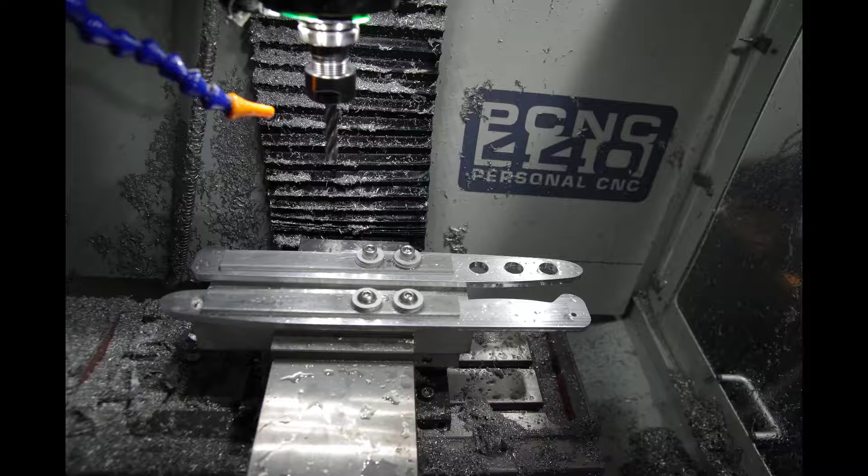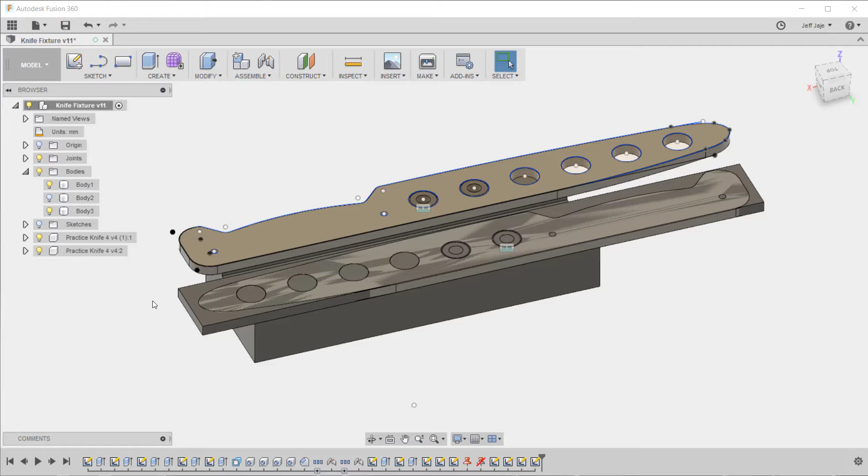Jeff from CAD/CAM Zen, and we're on part 3 of our martial arts training knife. We're actually going to be milling the knife here. So here's the knives and the fixture we previously made, and I want you to remember this is what the stock basically looks like. So when we're machining this, notice we've got some heavy material around this corner here, and obviously I've already machined these parts, so I'm just going to kind of show you some different ways that you could do it.

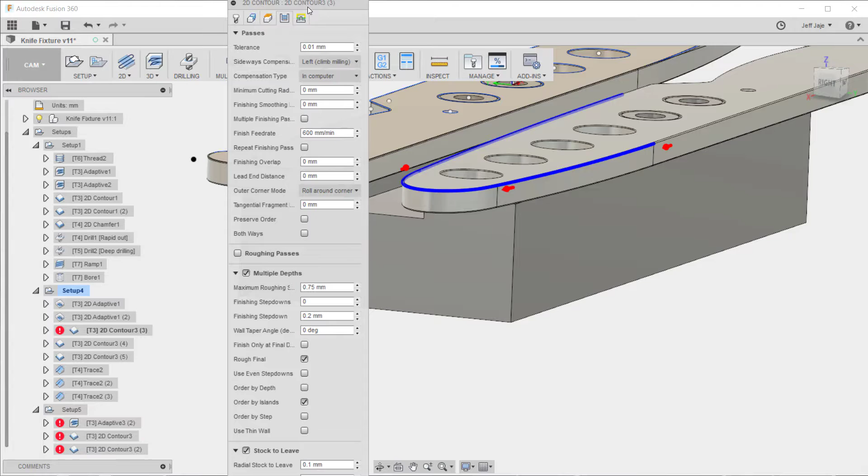One way that you could do it is you could do like a contour where you just constantly step down into the material a little bit deeper, a little bit deeper, a little bit deeper. And to set that up in your system, when you go to your setup here, you go to your multiple depths and how deep do I want each step down to be, and is it a rough, is it a finish, am I leaving material for finishing as I am here. Okay, so that's one option.

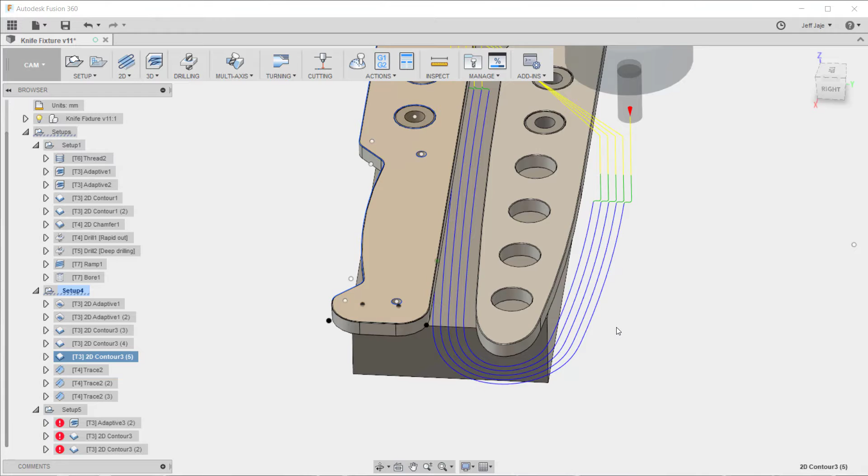Another option is you could step sideways into the part, but milling with a larger step down, so just cutting sideways instead of down into the part. Again, to set this up, if we go to our settings here, we can use multiple finishing passes and just give it the number of passes and the distance for each pass. Now the problem with that on this particular part is eventually they're going to start running into the knife next to it, so that's really not an option.

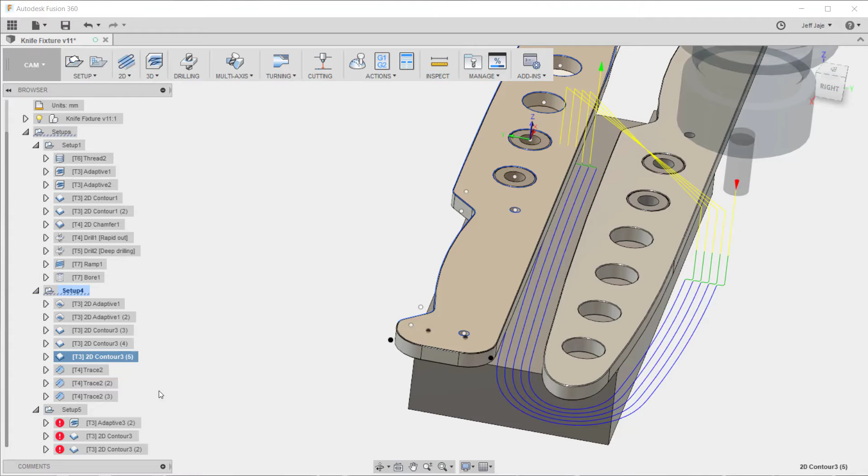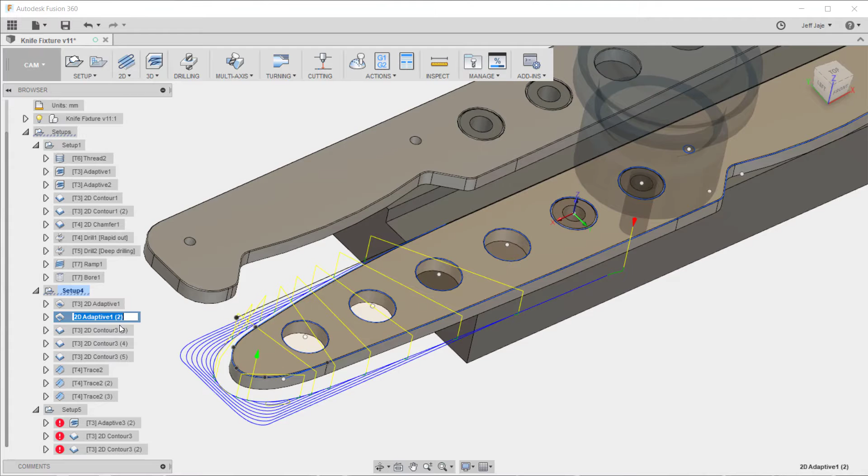Okay. Another option we could do is we could do like an adaptive clearing to clear the material out, so we're not stepping down in the Z, we're not stepping over too much or that type of thing, and I'm going to go ahead and show this adaptive. Now when doing this, there's a couple things we need to do. Let's take a look at that, because again, I didn't want it cutting all the way around. I didn't have enough travel on the mill. So when we get into our adaptive and all these cutter paths,

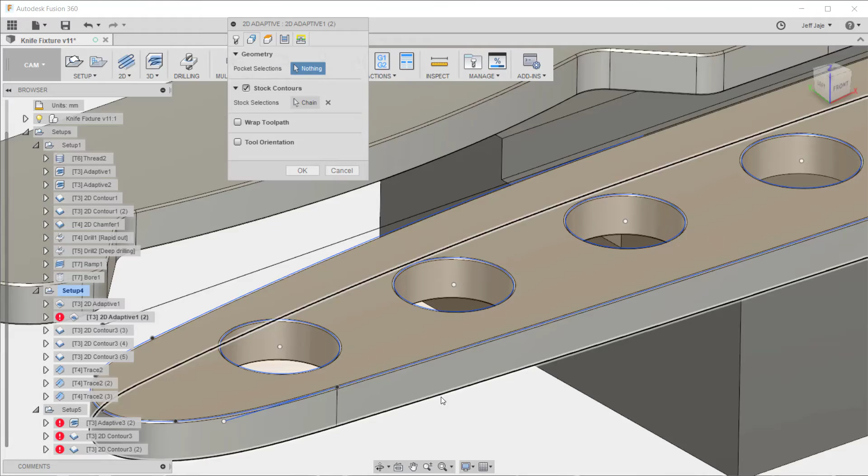when you go to select your curves, okay, so I picked this rectangle, which was that stock material we saw earlier. That's my stock contour, and my geometry is basically, I'm just going to be picking these curves here, and if I just go to pick the curve, it's going to go all the way around. Okay. However, if I hold down the Alt key and select, it's going to give me just that individual curve, and that's how we're going to go ahead and mill just that area that we need. So I go ahead and I use the adaptive roughing on those curves.

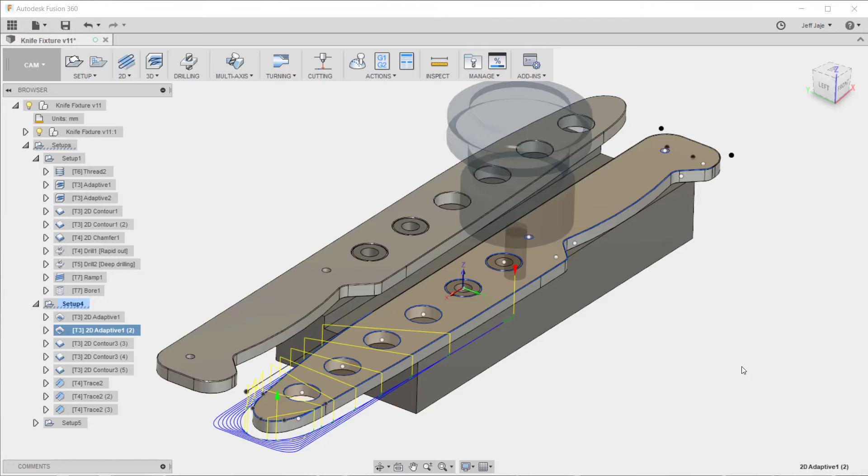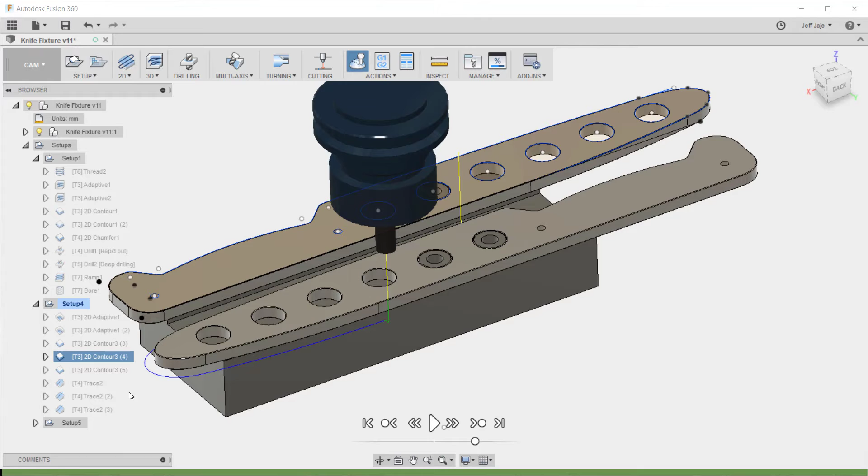So after the adaptive roughing, you can do a contour pass with just one cut, and I'm going to use a nice tight tolerance on it and one cut to make a nice smooth finish on that. In fact, if we go ahead and do a simulation on it, I'm just going to go ahead and play that with the simulate button and hit play, and you can see the tool going around there. We did make sure the knives were far enough apart so that the 3/8 tool could fit.

So you're probably wondering, how do these work for practice? Well, let's take a look at this video and find out.